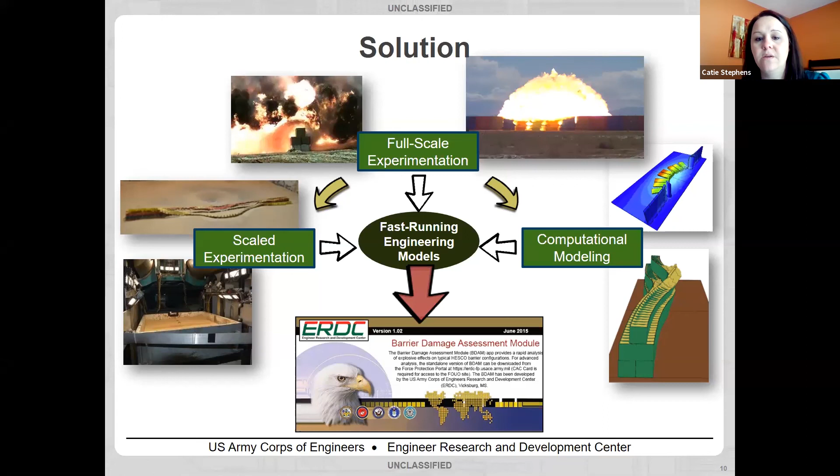So we did full-scale experimentation, scaled experimentation, and computational modeling in order to build that fast-running engineering model. For the scaled experimentation, this was done in the U.S. Army Centrifuge, which is located in Vicksburg, Mississippi, at ERDC.

The centrifuge, I hope you can see my mouse here, is over here in the top left corner. You can see there's a man standing up here, and a set of stairs that are normal sized stairs. So this shows you how big this structure is.

The way the centrifuge works is it starts spinning very fast around in circles, and the arm over here to the far left rotates up so that gravity acts straight through your model. So as it's spinning, gravity increases, and you get to the gravity that you need in order to scale to the level that you need to scale to.

So these experiments shown on the screen were done at 1/50th scale and 1/100th scale. The full scale versions are full scale experiments that we ran. At the top, that barrier is about 6 feet tall, and the bottom barrier is about 13 feet tall.

The 6 foot tall centrifuge model was about under an inch tall - that's 1/50th scale. And the bottom, full scale barrier that was 13 feet tall, the centrifuge model was 1/100th scale.

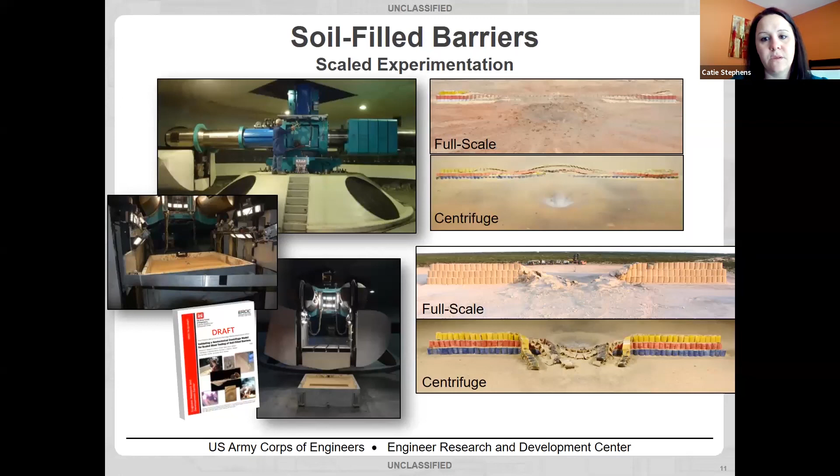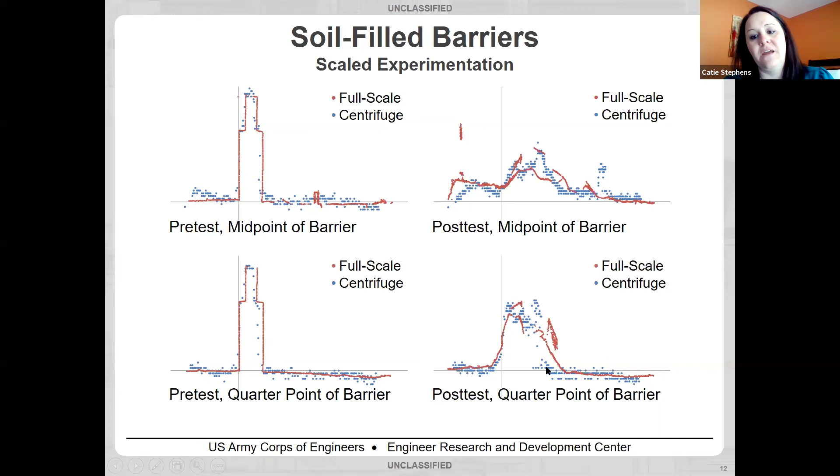And then post-test is really where it gets impressive. So at the midpoint of the barrier, this is the damage that you saw in the full-scale experiment in red. The blue is the damage you see in the centrifuge model. And you can see that they align so well that it's impressive. And then on the bottom there is the quarter point of the barrier, and again, they align so well that it's very impressive.

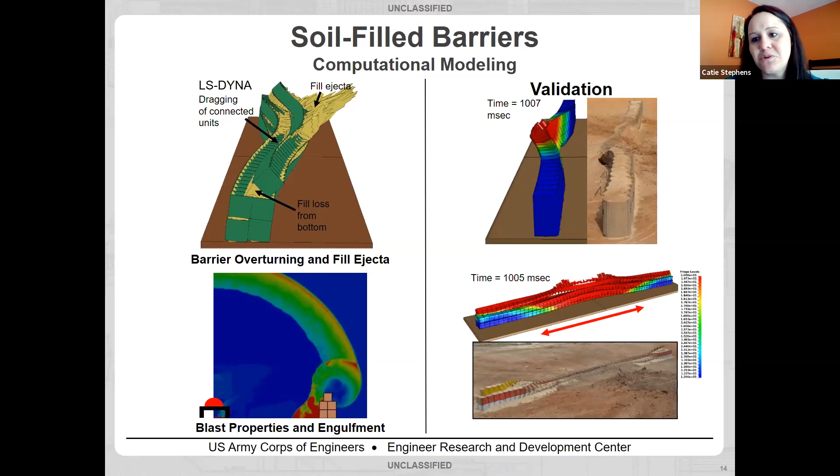Like I mentioned before, we also did the same set of experiments, very similar, for concrete barriers. So in phase 2, we started studying the effects on concrete barriers. We got the engineering model to work very well for the soil-filled barriers, and we thought we could expand it to concrete barriers pretty easily. So we did a few experiments in the centrifuge, and we also did a few full-scale experiments, I think about 7 total. Then we did some computational modeling for the concrete barriers also.

The way we did the concrete barriers was we 3D printed them to scale, and then we inserted some copper rods inside of them to get the mass correct again. We weren't trying to model the material damage of the concrete. We didn't expect a whole lot of material damage because the explosives were not necessarily touching, and we weren't looking for breaching effects on the concrete. We expected the whole concrete barrier to kind of overturn and not see a lot of material damage. So since we were not looking at material damage, we were comfortable with just 3D printing with a composite material and not worrying about any type of material damage occurring.

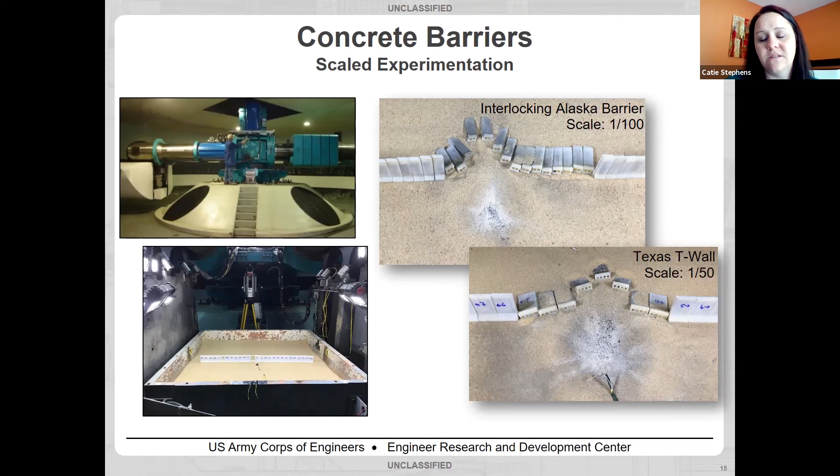We did a couple different experiments, one where we cabled the barriers, one where we didn't, to try to see how the cabling affects the failure. In total we did about 7 experiments and got a lot of good results out of that.

So again, we used LS-DYNA for the computational modeling. We weren't looking a lot at material damage on these. We were looking a lot at overturning, and the model matched the overturning from the experiments very well. We're very positive that we can use computational modeling to predict the results of any type of VBIED on a concrete barrier perimeter. We also, in the computational models, could combine the soil fill barriers and the concrete barriers, and we're pretty sure we could get accurate results.

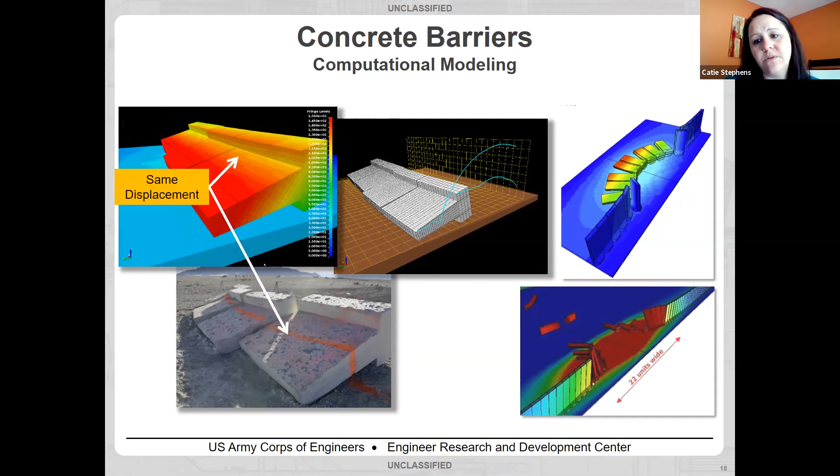We have a few experiments of that, but not enough that we've been able to implement that into the engineering model. So in conclusion, on my part of this presentation, we were able to develop the barrier damage assessment module. So we have an engineering model that works mostly off of rigid body motion. There are some pieces of the model that help us predict the blast pressures that are affecting the rigid body motion, and those are very important to the engineering model that we used.

But this computer-based application is available to any soldier. They have to be able to use a DoD ID, their credentials, to access the app. So they put their credentials into their computer, and then it lets them access the app.

And they only have to put in a few inputs. What does their barrier look like? What type of soil is it if there's soil? What is the explosive? And it's very general. They don't have to know exactly what type of explosive. They can say it's a van, or it's a truck, or a car or a motorbike or something like that. And then it pops out the answer, how big of a hole they're going to have in their perimeter if that type of vehicle-borne improvised explosive device came up to their barrier.

And it's very easy. There's some graphical displays. It shows how large the breach in the barrier is. And then also it shares with them some other information that might be valuable, like how large the crater is, so they can tell if a vehicle might be able to drive around the crater and drive through the breach in their perimeter. It also tells them if there will be injuries around that area to humans, like if they would have lung damage, or if they could have hearing issues after the explosion.

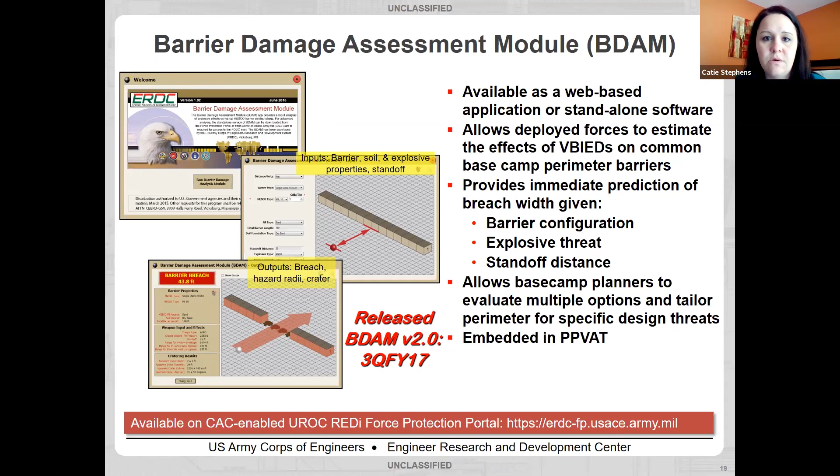So I'm Bowen Woodson. I am a research structural engineer in the Geotechnical and Structures Laboratory. I do a lot of work now under Catie's program for Expedient Protection.

I went to school at Tulane University, where I double majored in baseball and chemistry, focusing primarily on baseball, of course, and I minored in math. And then from there, I went to Mississippi State University, where I got a civil engineering degree, an undergraduate degree. And then I went to graduate school in California at UC Davis and got a master's in structural engineering.

So I started as a student at ERDC in 2015, and did that as a student, as an undergraduate at Mississippi State, and then as I was still working on my master's at UC Davis, and then came back in full time to work full time.

So one of my main areas of research is hostile vehicle mitigation. I'm going to talk today about a barrier that we developed and demonstrated. It's a mouthful, it's called the Field Expedient Non-Lethal Vehicle Arresting Barrier. All right, so we acronym everything in the Army, so we call it the FENVAB. So I'll refer to it as the FENVAB.

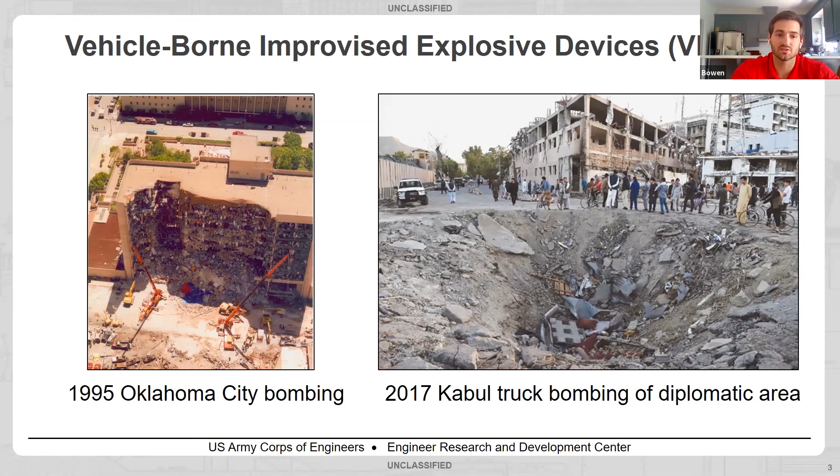Now we're also seeing another type of vehicle attack, and this is a ramming attack. These have been around for a while, but they've really picked up starting in 2015, 2016 in the US and in Europe. One of the most famous ones happened in Nice, France, where 86 people died. These attacks are super unsophisticated. They don't take any coordination. It's just one person jumping in a truck and driving into crowds of people. So they're very devastating, and they're very hard to predict, hard to mitigate because of their simplicity.

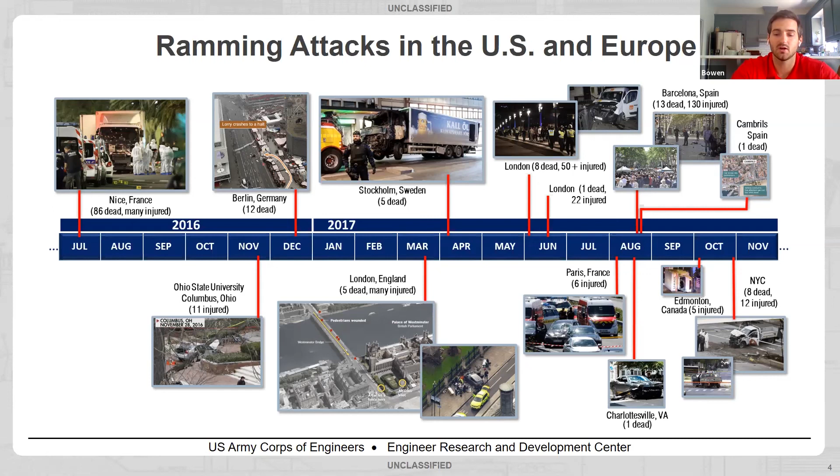So we saw that these types of places can be a target, like in Las Vegas at the outdoor concert where there was a shooting. So where large groups of people gather, we have to find ways to protect those people.

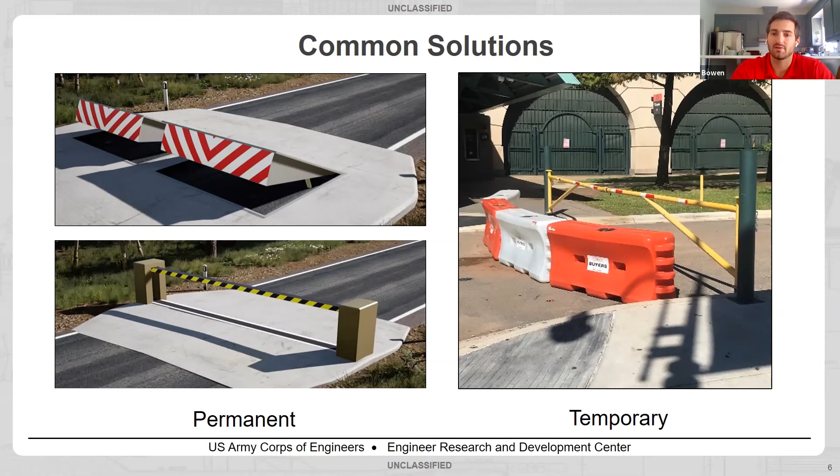You can't move these as easily to allow vehicle access, but they're also important for securing your perimeter. So what we developed, starting about 10 years ago, was the FENVAB. Development began where what we wanted was something made with very simple materials, without a whole lot of engineering support, and not requiring a lot of tools or specialized equipment.

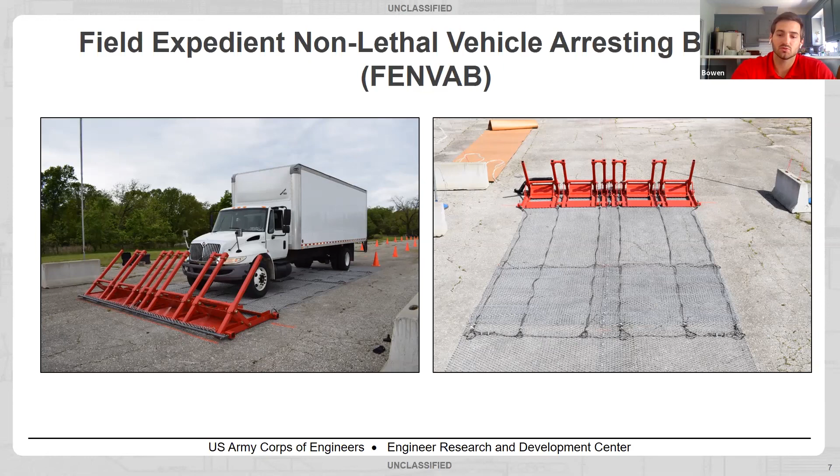We've been working on expedient vehicle barriers for the past 10 years, and this is our spiral of development. We've tried lots of different things. In 2013 was the first time we started testing the FENVAB, and at that point we had two prototypes: the lambda barrier and the L barrier. They effectively did the same thing and relied on the same materials, but were just two slightly different styles. They were modular, but we hadn't actually tested them with multiple units linked together, only against smaller vehicles as a single unit.

Last year, we did our first test where we linked several of them together. For the lambda barrier, we made some modifications and tested it against a larger vehicle.

Currently, under Catie's program, my team is working to develop another expedient barrier similar to the FENVAB, using the same active barrier technology, but packaged a little differently and more kitted. The purpose of the FENVAB was to make it very simple, so anyone with a set of drawings could go to their local vendors or suppliers, pull the materials, and put this thing together.

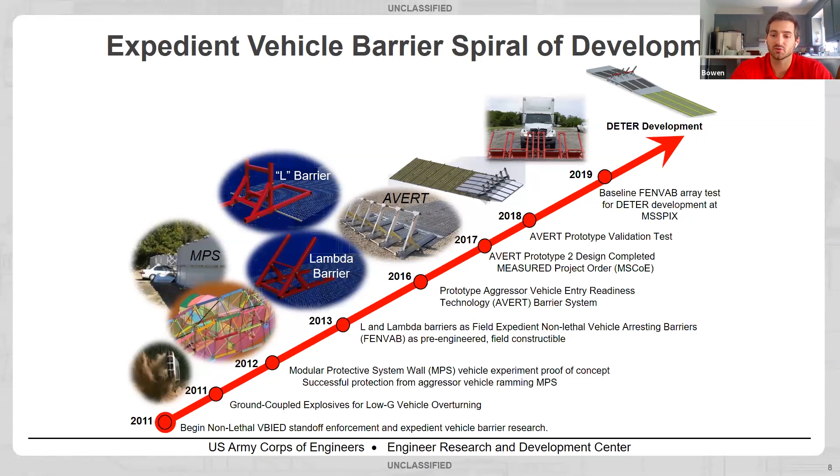We do have patents on our barriers. Right now we have 3 patents. The FENVAB is one of the barriers we've developed. We also have another one that's been under development for the past 4 or 5 years and is coming to its finish line. We're seeking a patent right now for the DETER, which is Deployable Expedient Traffic Entry Regulator — that's another acronym. That's the one we're working on currently.

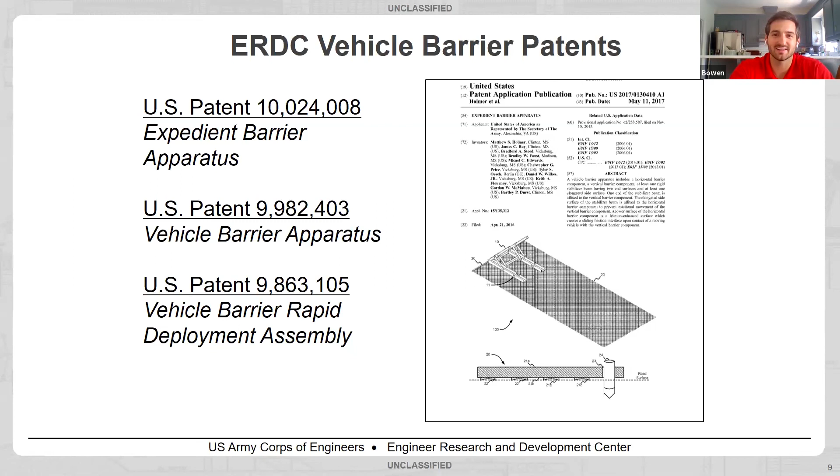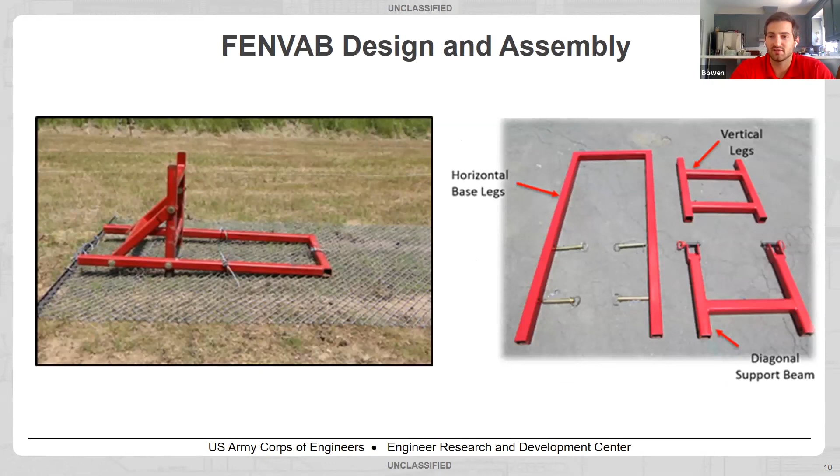As I mentioned, we had 2 different prototypes. On the left is the L barrier, with the pieces shown on the right. Basically you have a horizontal base section and then a vertical section, and it all connects to a chain link that's used as a mat.

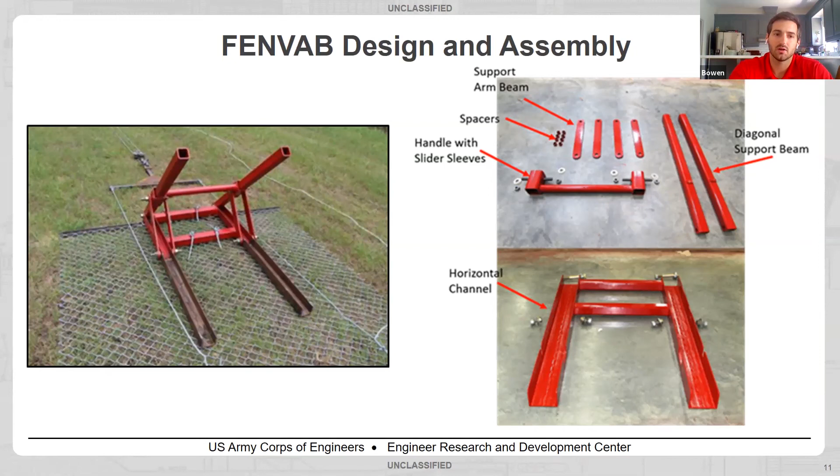This is the same concept, but the lambda version. It has a horizontal base section and then diagonal arms, and straps called support arm beams that link those diagonal arms to the horizontal channel. That's where a lot of the load is transferred at impact.

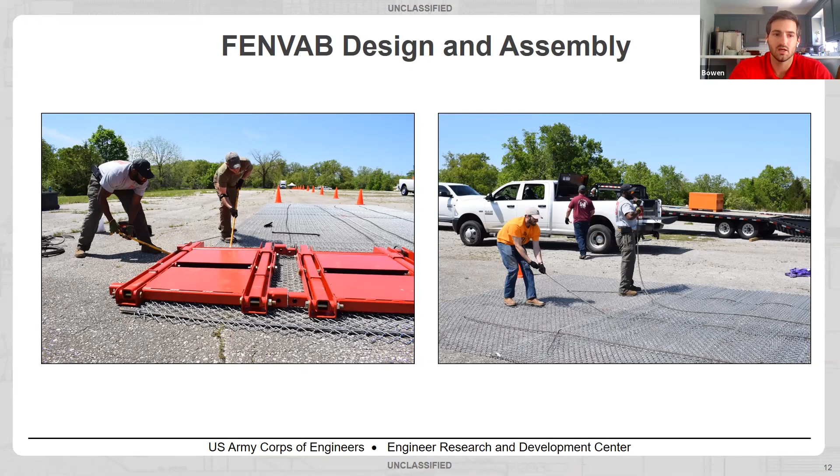The mat, or the chain link, kind of acts like a mat, or like decking where the tires sit on it, but most of the load is actually being transferred through the cables. The left shows the finished version.

The right shows the fence hooked into the front of the base of the barrier, and we have just an angle and a flat bar bolted in. It sandwiches that fence in there, so that keeps it secure. The concern is separating the mat from the base of the barrier, so we have to be very deliberate about how we make that connection.

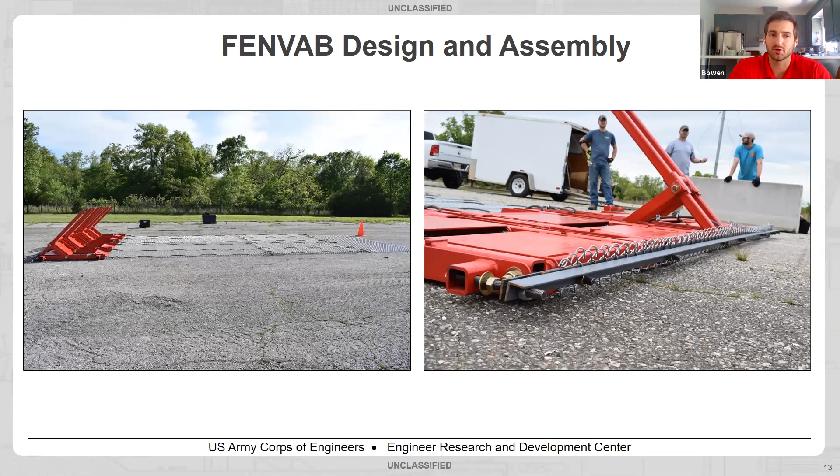Another really cool thing about the FENVAB is when it lays down, you don't have to lay the whole thing down to allow access to vehicles. This shows if we just lay the middle sections down, we can allow access to a large truck. We could also leave the middle section up and lay the outside sections down, and that would allow 2 lanes of traffic for small cars.

So how do we do this? How do we do our research and development at ERDC for all of these vehicle barriers that we've worked on over the past decade? It includes really, I guess, 3 phases. There's LS-DYNA modeling and simulations, which is very important, and we do an experiment using the remotely piloted vehicle system that we have, RPVS, which was developed by ERDC.

What it is, it's a way that we can safely guide the vehicle down into the barrier without a driver, so we don't actually have to put anybody in there with shoulder pads and a helmet. We just hook this system up, and there's a guy that sits off to the side, and it's like he's playing Mario Kart. He sits there and drives this thing flawlessly down a lane and impacts it at whatever speed we tell him to. It's very impressive.

We also put accelerometers and strain gauges on our barrier and on our vehicle, and we can validate the model and see how much damage we're incurring on our barrier. We can also track the acceleration, velocity, and displacement of the truck - how far it slides, how quick that drop in velocity occurs. Then we go back, refine our model, and may do another test. It's just a circle as we continue to push out new types of barriers or push our barriers to new limits.

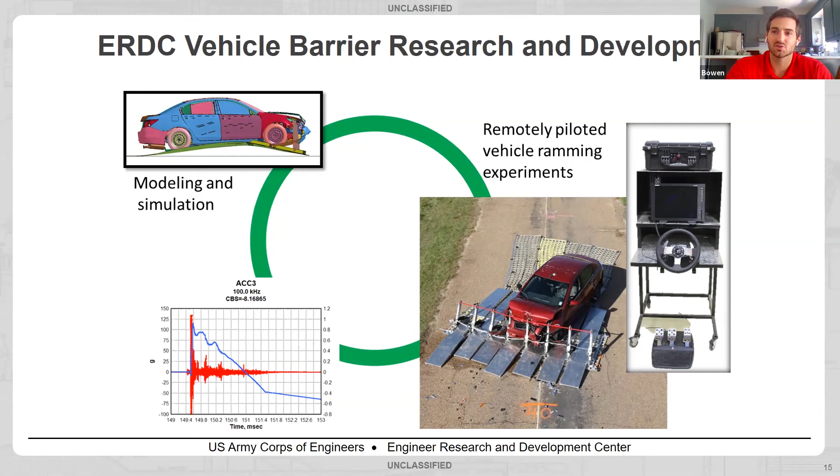Maybe I will have more luck playing videos than Katie. Let's see. So this is - I can see it. Hopefully y'all can see it.

It is a truck, LS-DYNA simulation of a truck impacting the FENVAB. This simulation was not done by me - it was done by another guy in the survivability engineering branch, one of our colleagues. And this truck was not developed by ERDC - the truck model was actually developed by Federal Highway for their crash testing.

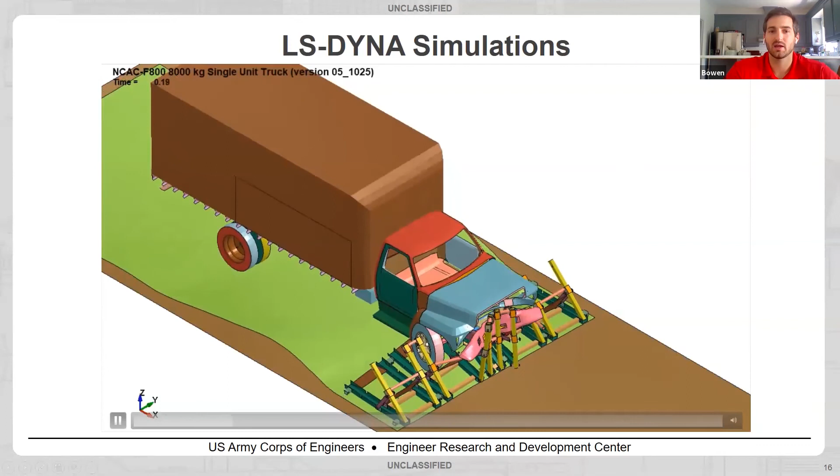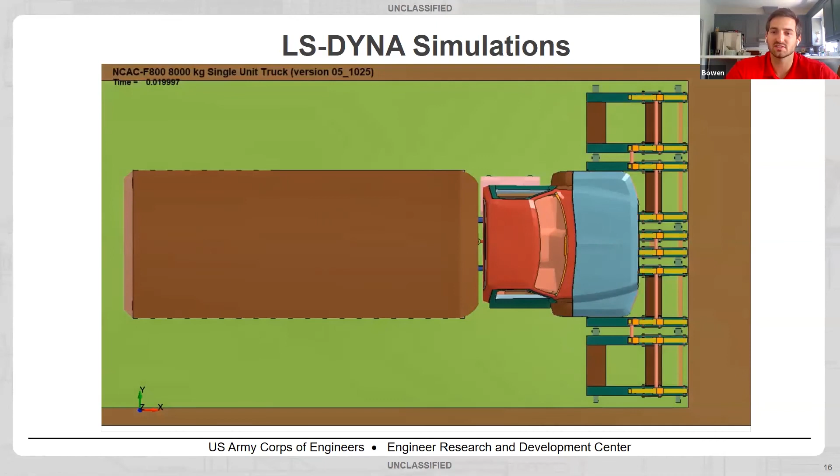It's very important to get a truck that behaves and deforms like an actual truck. You can't just use a solid block of mass and run it into it because it won't behave the same. There's a lot of assumptions in any model that you make. One of the primary assumptions here was coefficient of friction. It's a friction-based design, so we had to assume a coefficient of friction, which may or may not be what we actually see on test days.

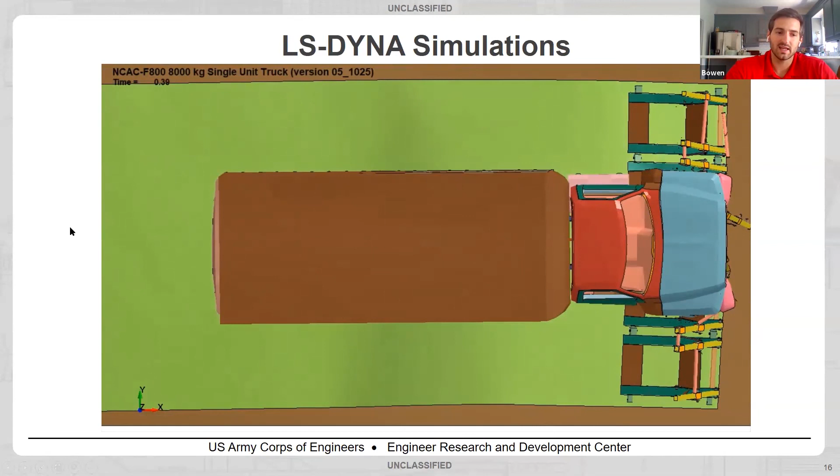But we take our best guess and try to get a prediction based on the model. So in the actual experiment, we put some strain gauges on those straps that connect the diagonal member to the base section. We wanted to see what kind of strains we were getting compared to our model.

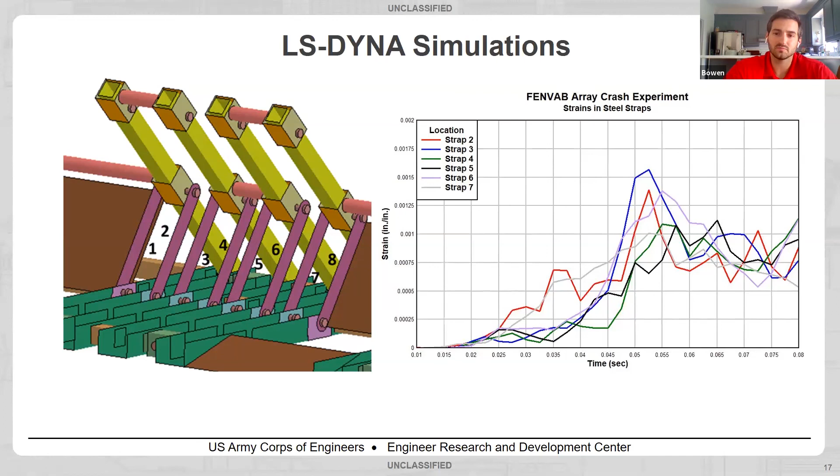Prior to the test, we took measurements at 8 locations. I don't show 1 and 8 here. 1 and 8 had really high strains, and the reason those strains were particularly higher was they are on the outside, and the span from that strap to the next strap is much longer, whereas the other ones are caught in between the middle, so they have lower strains. So I only show 2 through 7 there, but they're all about the same.

And then this is the crash experiment. Hopefully you can see this - this is the fun part. It has a little noise, I don't know if you'll hear it or not. There might be a lag too, I think it might be lagging.

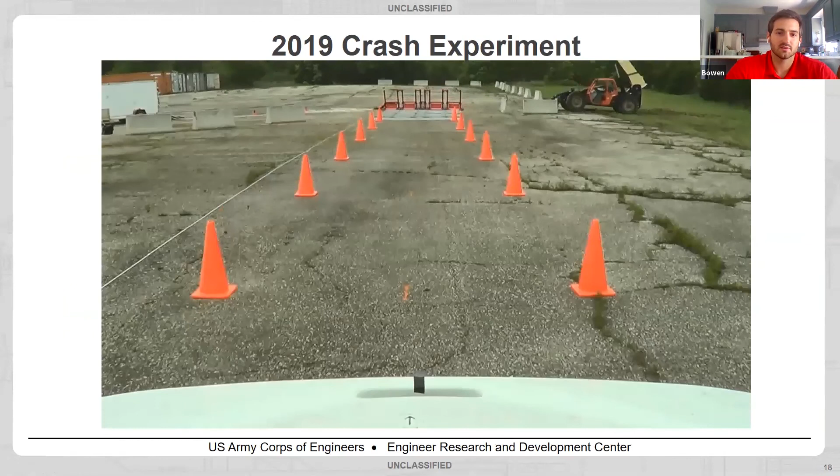But this is the vehicle, being remotely driven by our team. Like I said, they're pretty impressive through the cones. And then it just impacts and skids to a stop. There's a few different views, hopefully you can see.

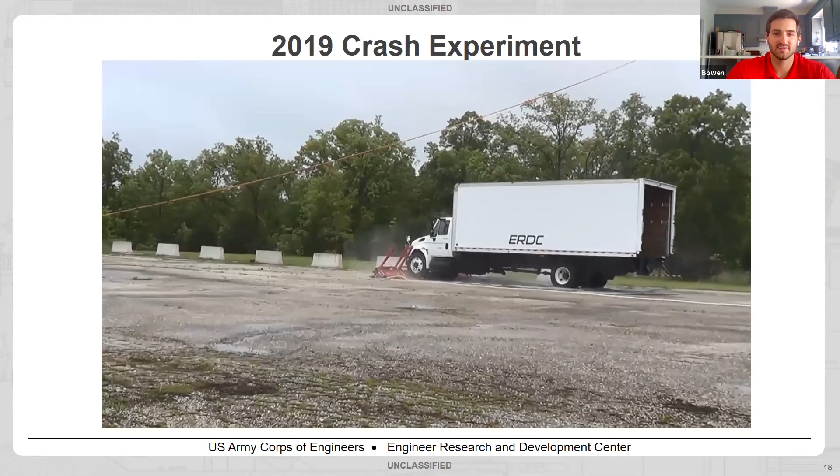Hopefully you're seeing this, there's also high speed here. You can see how it behaves, kind of the wave of the mat, also how the truck comes off the ground slightly in the experiment at impact. And then in the model, it's really the same type of behavior.

The model was actually a little more conservative. There was some shearing of some elements early on, specifically the connection of the straps to the base, and that's why we put the strain gauges on those straps. That's why we chose that location, because we thought it was going to be a critical location. So we got the strains from the model to compare them to the experimental strains.

We also did a few modifications prior to the experiment to beef up that section. We added some thickness to the straps around the bolt where it was shearing. So that's one benefit of LS-DYNA - it's a much cheaper way to inform our barrier design, other than doing crash tests over and over again, which are not so cheap.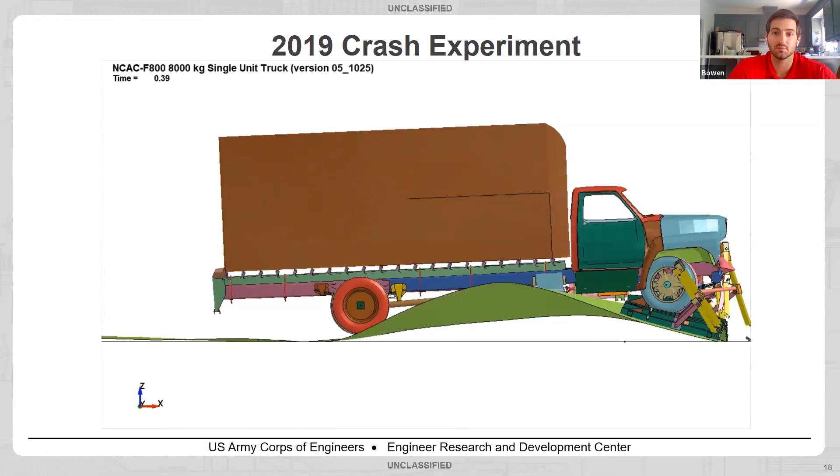This is what it looked like following the crash. You see there's lots of damage there on the truck. We call this the FENVAB, and the N in FENVAB is non-lethal. You can see in the cab there, it's really not damaged at all. If I had a picture inside the door, which I don't, you could see that there was no damage to the inside of the cab. So the driver likely wouldn't have died, and probably wouldn't sustain serious injuries.

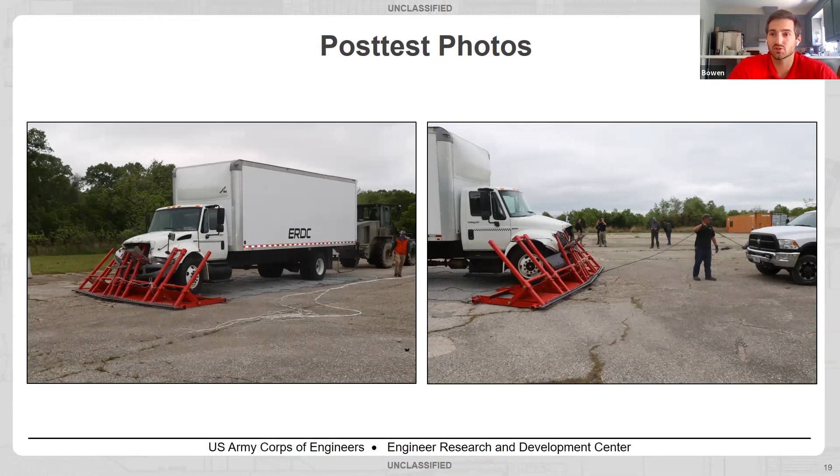This is a picture of the barrier following the crash, and the truck. So you can see there's significant damage to both.

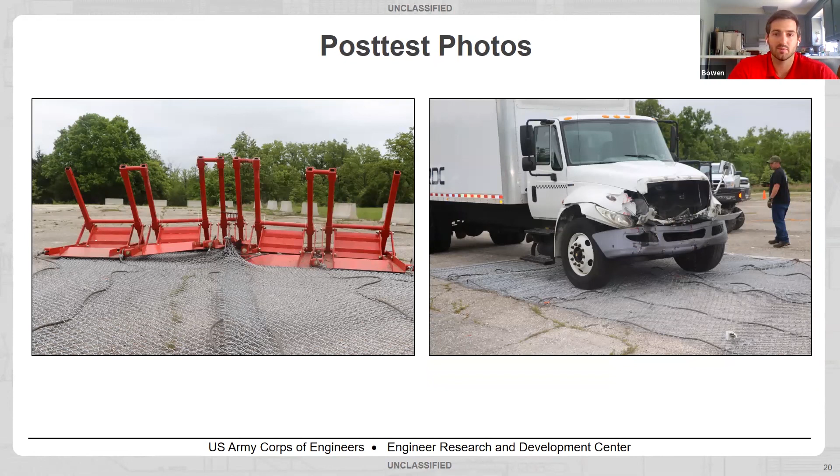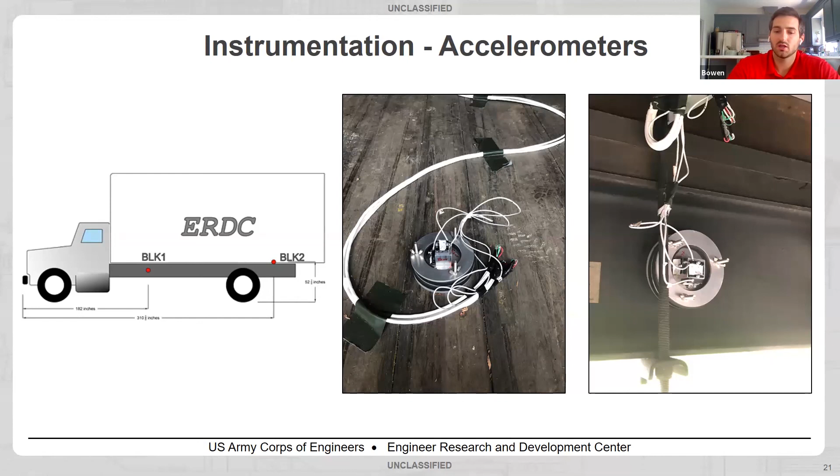So I talked about instrumentation, and the accelerometers was one form of instrumentation that we did in this experiment. We had two accelerometers, one at the front of the truck and one at the back of the truck.

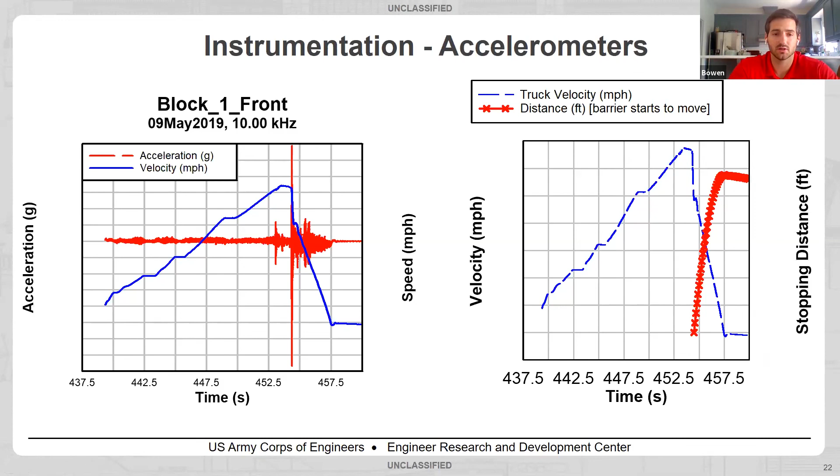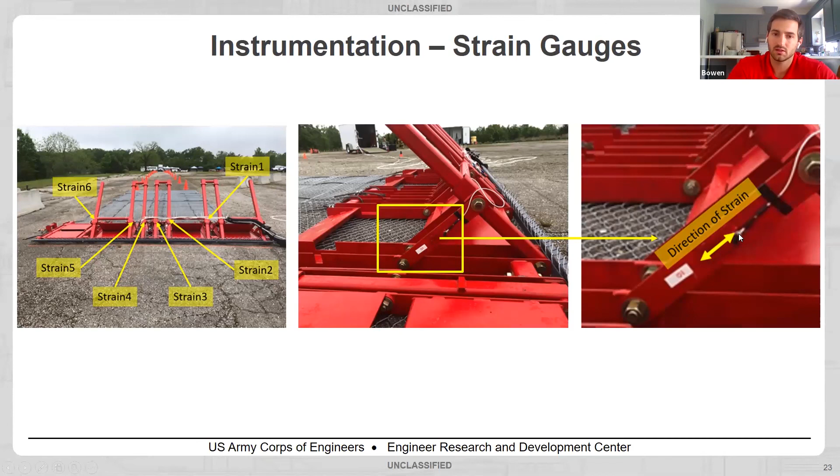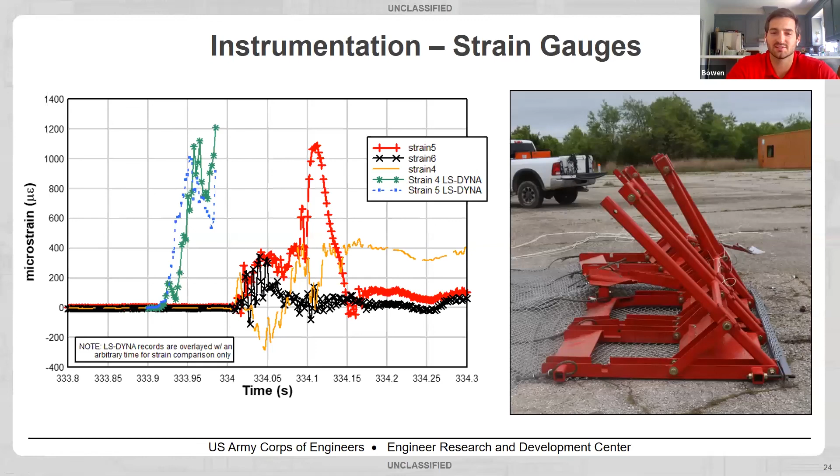The only one that had significant plastic deformation was strain gauge 4. Looking at the barrier itself, not all of the arms are forward with a lot of plastic deformation, but the ones in the center were most impacted, specifically the arm with strain gauge 4. So it was good to see our strain gauges were giving us the same data we could see with our eyes.

The walls and roof just unfold. It has a mat made of a different material, an ERDC developed material called ACE mat that's used for vehicles trying to cross soft terrain. It's very durable and flexible. You can fold the mat out like an accordion and it's in place. It takes less than 30 minutes, which is what we're hoping to accomplish with this.

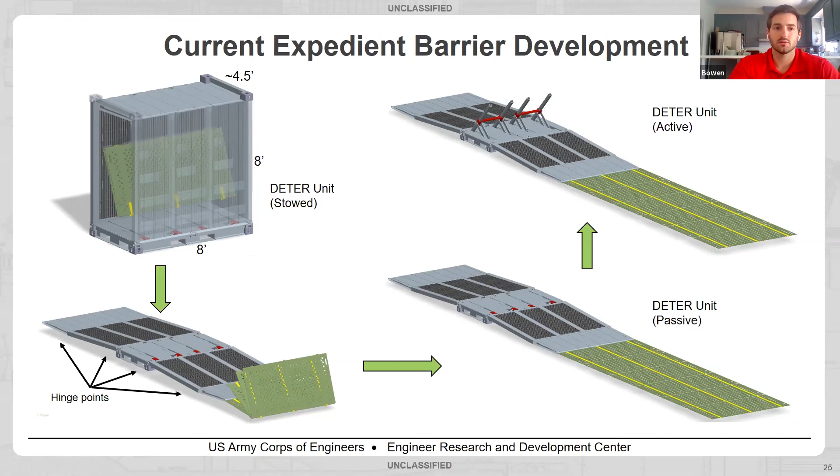It's the same type of technology, just a different approach. This is a more kitted solution, nicer looking, but more specialized — like a commercial off the shelf technology. All right, so that's really it for the FENVAB and for vehicle barriers.

I'll probably pull Katie in on this, she knows this better than I do, but we have job opportunities for students. One is called the Pathways program, which I was on as a student, where I came in during summers, Christmas break, or spring break, whenever I wasn't in school, and I could work. It was great for me. I learned a lot in those years as a Pathways student, and the job was always there, so I didn't have to worry like other students about where they'd work that summer or what their internship would be. I always had a spot at ERDC. Once I graduated, I just converted over to full-time, and it's very easy for them to convert you. It's a great program.

We also have the College Qualified Leader, CQL. That's kind of like a mentorship program for undergraduate students where you're matched with a mentor who guides you through. It's also a great program. And we have the SMART Scholarship, which is awesome. Katie was on that one, so she can talk more about it, but it's a pretty unbelievable program, in my opinion.